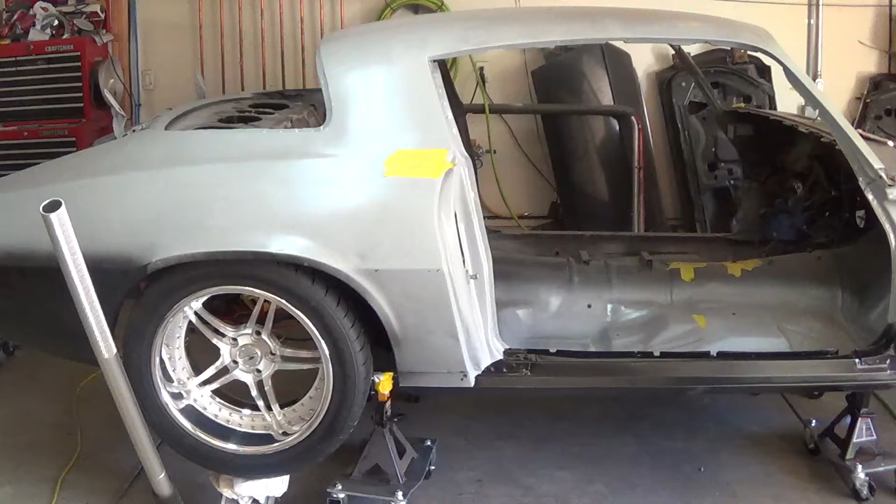Hey everybody, it is ASIC Eric, and we're going to talk about offsets and back spacing and rear ends and all kinds of stuff today.

So you can see I have this wheel tucked up in there about where it's supposed to go. It's pretty close. I think it's about centered in the wheel opening. I think all is about good there. Now where it's sitting right there, it is hitting the seat belt hump in there and is just touching the inside of the lip right here. So it's making contact in both places where it is right now.

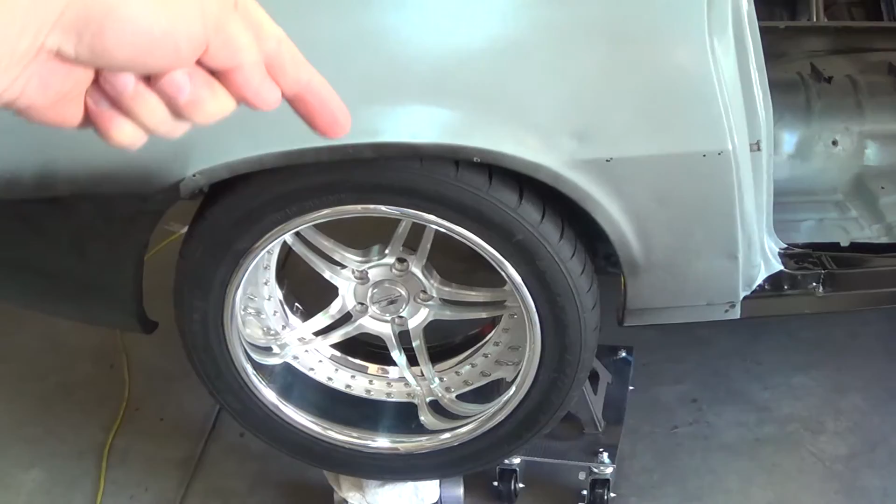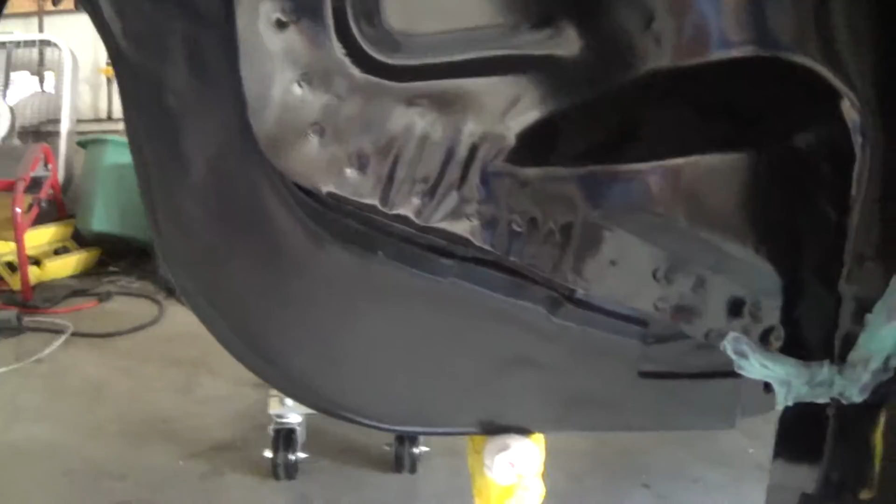As I mentioned in the other video, with this thing pushed all the way back where it's hitting that seatbelt hump, the measurement we get from inside of the wheel to inside of the wheel is 58 inches. And I'll go over all the specs and dimensions on that and talk about how I calculated the rear end size and all that. But I'll drop this down here and show you the stuff inside there that I was talking about.

Alright, so on these second gen Camaros, your trouble spot is right here. This hump right here is right where the seat belt is, the rear seat belt. So that thing sticks out about 1.5 inches to 2 inches at the fattest part. I don't know if you can see, there's some scuff marks on there where the tire's been hitting. So the tire comes to about right here.

So one option you have on these cars is to get the big hammer out, beat the snot out of this and flatten it out basically, and you can get yourself another inch and a half of space there. The other option you have is the lip here. You can roll this lip up and get yourself some more clearance that way too.

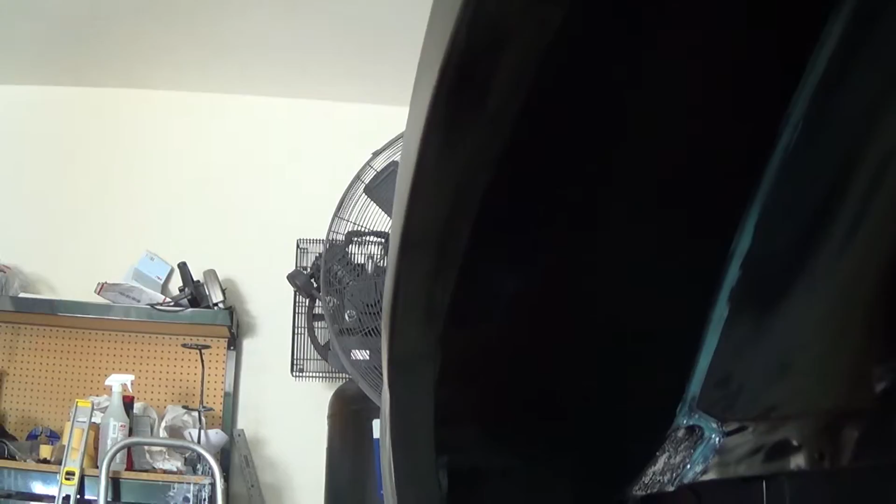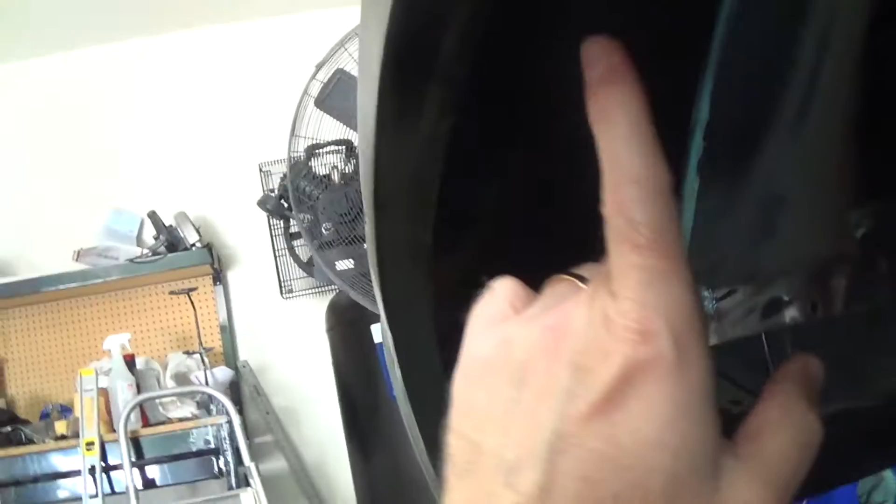So as I was saying, with these wheels, again, these are 18 by 10 inch wheels. We're making contact here and here in both places. But pushing the wheel, like I said, as far as you can go this way, really, is a 58 inch distance from the inside of the wheel to the inside of the wheel. So let's go look at, I made some drawings so we can show how all this works.

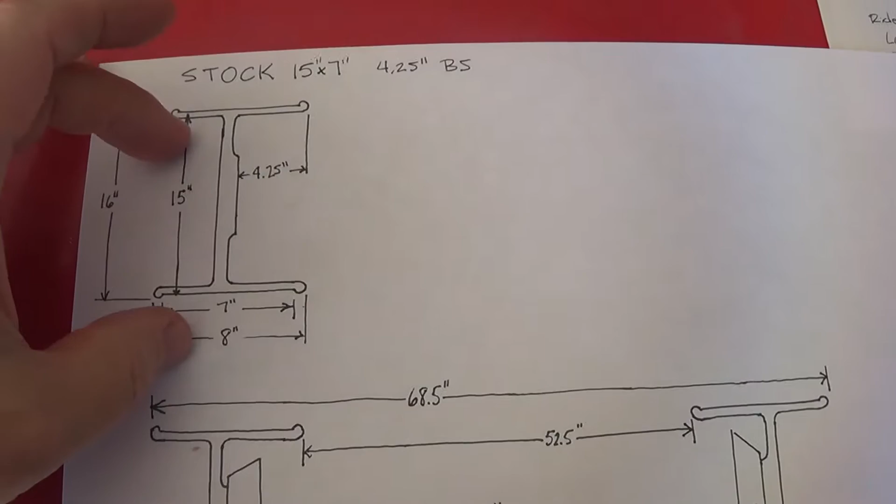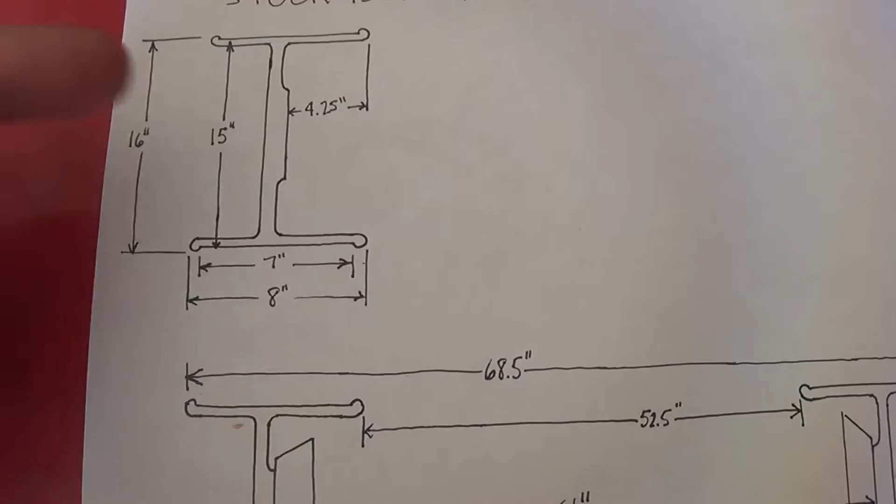So starting with the stock wheels, one thing I didn't realize when I was doing all the math on my wheels was I thought the stock 15 by 7 inch wheels were a zero offset wheel, which meant the mounting point to where this would attach to the drum would be in the center of the wheel. Well, it actually isn't. It's offset by 1/4 inch that way. So the wheel tucks in a little bit from where it would sit naturally.

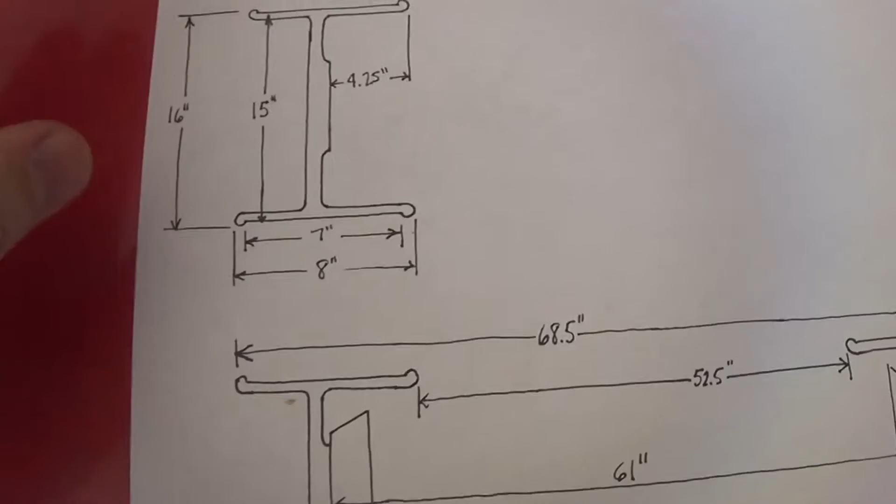And for those of you that don't know, and I hope I have all this correct, I'm trying to go over this as many times as I can to make sure I understand it. So how all this stuff works is, if you have a 15 by 7 wheel, the 15 is from the outer edge of the barrel to the outer edge of the barrel, and the 7 would be from the inside of the lip to the inside of the lip. So that's basically the wheel mounting surface.

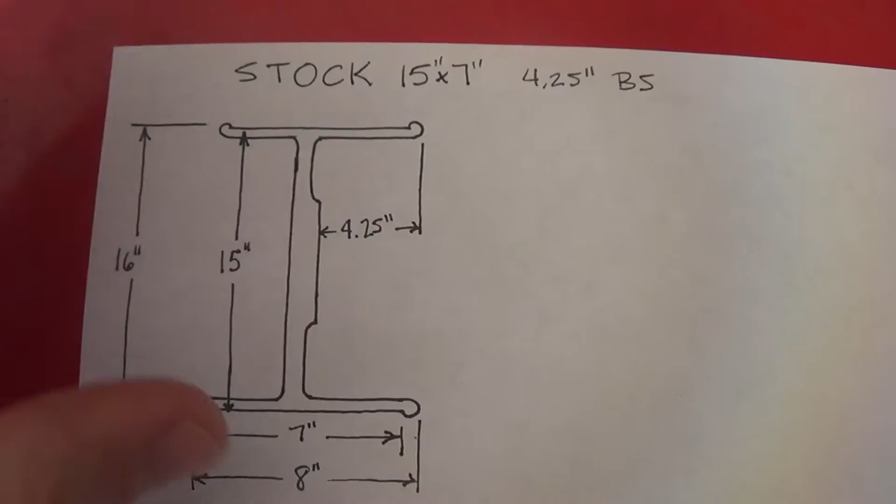So if you look at the tire mounting surface, the dimensions of the tire, that's what you would have. The actual wheel itself is bigger than that by 1/2 inch on each side. So the lip sticks out 1/2 inch this way and out 1/2 inch this way. So your overall dimensions are actually 1 inch bigger. So a 15 by 7 is actually a 16 by 8, as you see here.

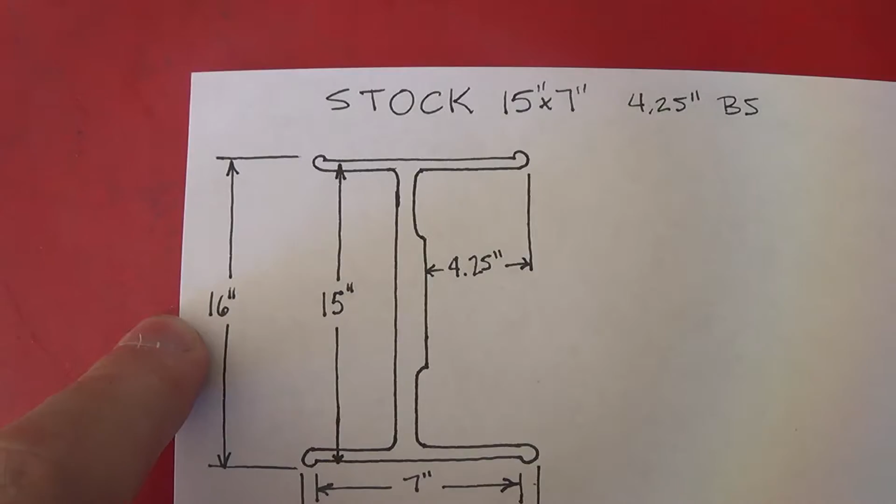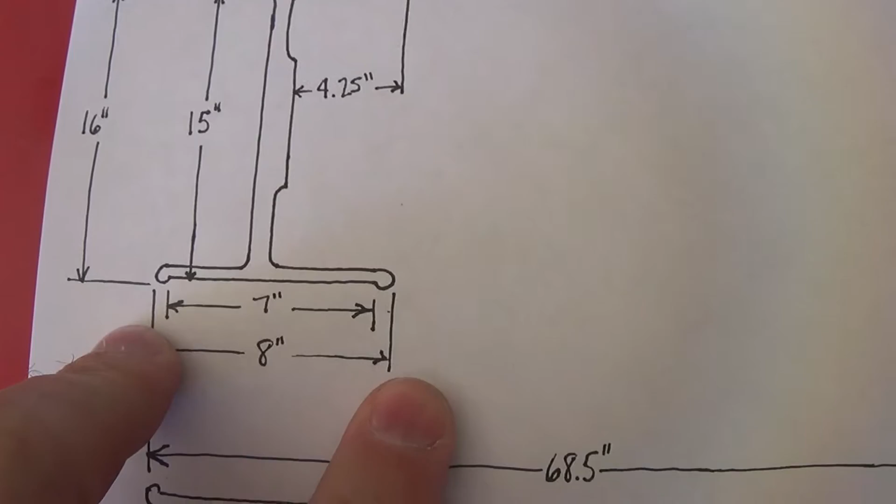The back spacing is measured from the mounting surface to the lip, not to the inner edge. So you're not trying to check the back spacing against the 7 inches, you're trying to check it against the 8 inches. So for a zero offset wheel, being an 8 inch wheel, a 4 inch back spacing would be right in the center, but this is a 4 1/4, so it's 1/4 inch further that way than a zero offset wheel.

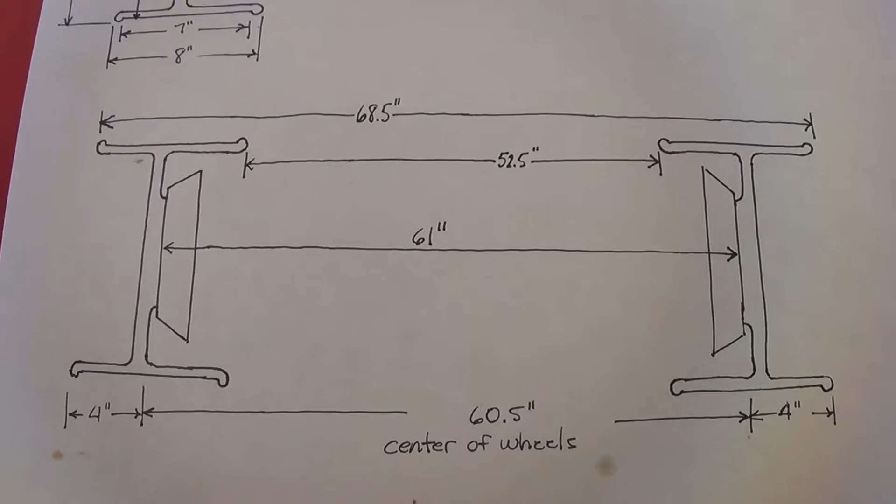Now here's all the dimensions for a theoretically stock Camaro. I didn't measure all this stuff before I took my car apart, but I think this is correct. The drum to drum distance on the stock rear end is 61 inches. I was talking with Moser today and they said 61 1/8. So it's close enough. We're going to call it 61. And then if you apply all this geometry here, what do you get?

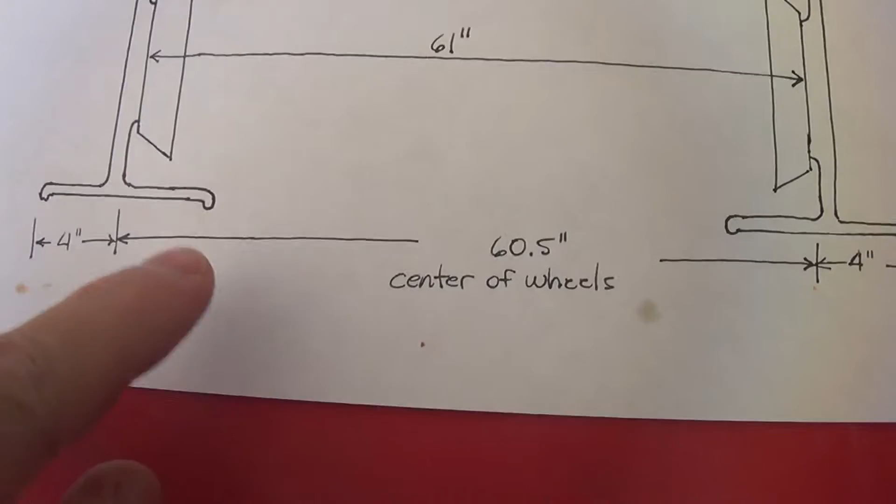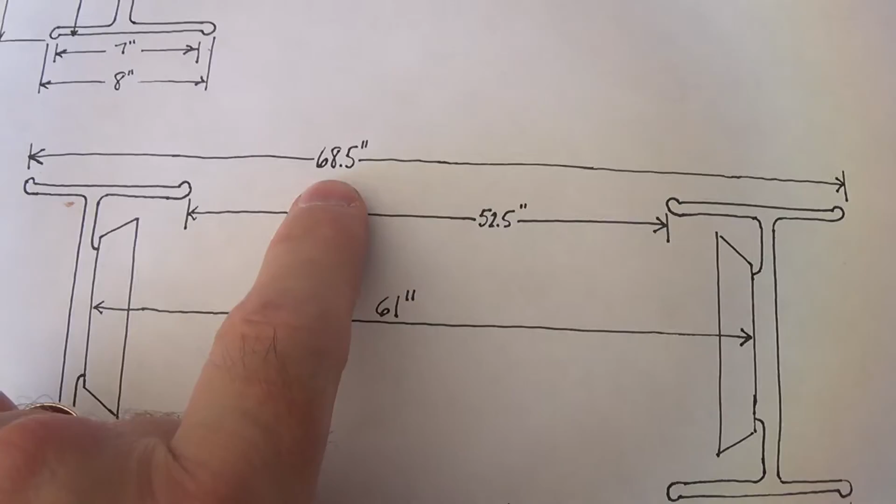So if you take that 61 inches there and you take off the 4 1/4 backspace on each side, that gives you this dimension right here. So from the inside of each wheel rim lip to the inside of the other is 52 1/2, and if you go to the outside it would be 68.5. Okay, and then the other thing that I did for calculation is where would the center of the wheel be.

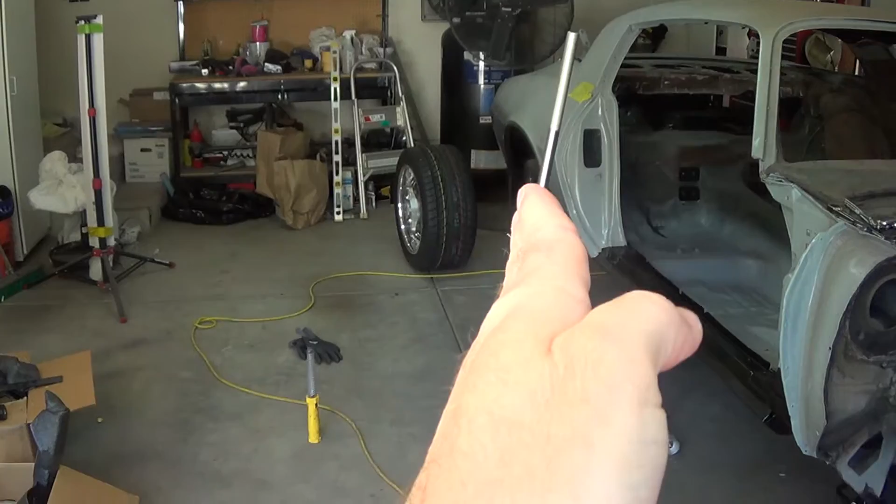And if you measure from the center of the wheel to the center of the wheel, which is theoretically, I don't know if it was done this way from the factory, but theoretically the center of the wheel opening there, you get 60.5. So that's all stock, which is not what I'm doing, but that's what you have.

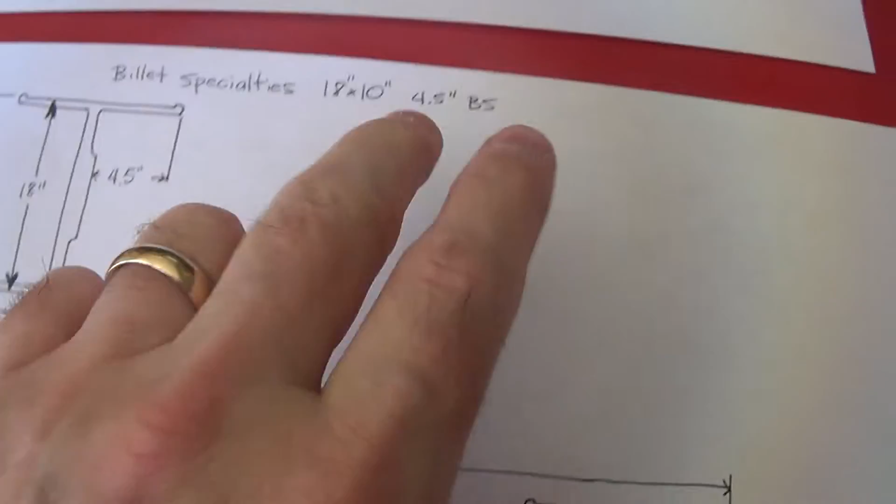Okay, now you go from there to the wheels that I have. So the wheels that I have are 18 by 10 with a 4 1/2 inch back spacing. So if you go through all of this stuff again, same idea. So 18 by 10, those are the inner dimensions there. So that's really a 19 inch by 11 inch wheel overall.

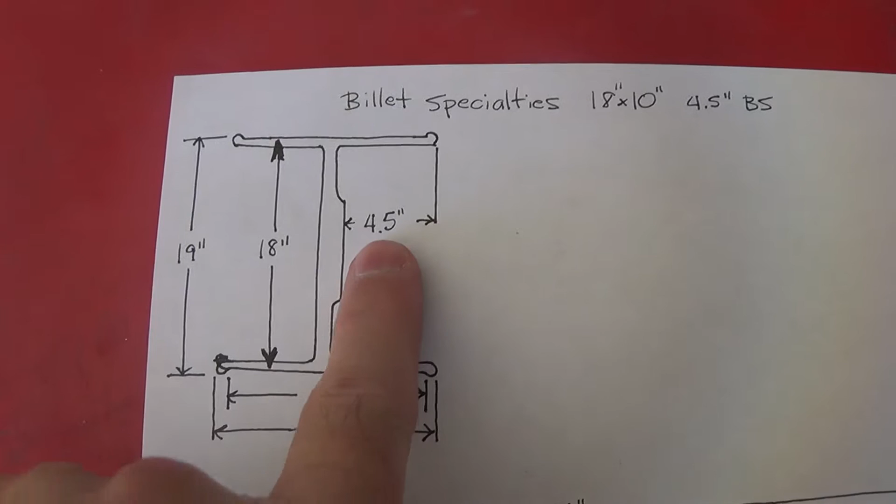So since it's an 11 inch wheel overall, a 0 back spacing on this would be half of that, which is 5.5 inches. But I went with 4.5 inches, as I mentioned a number of videos back when I got the wheels. So that moved the dish of the wheel in by an inch to give me more barrel here. So that's a 4 1/2 inch back spacing.

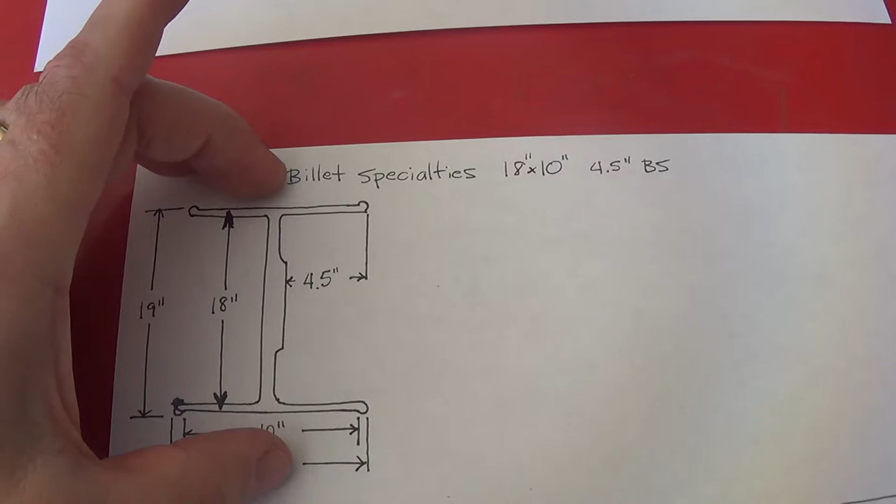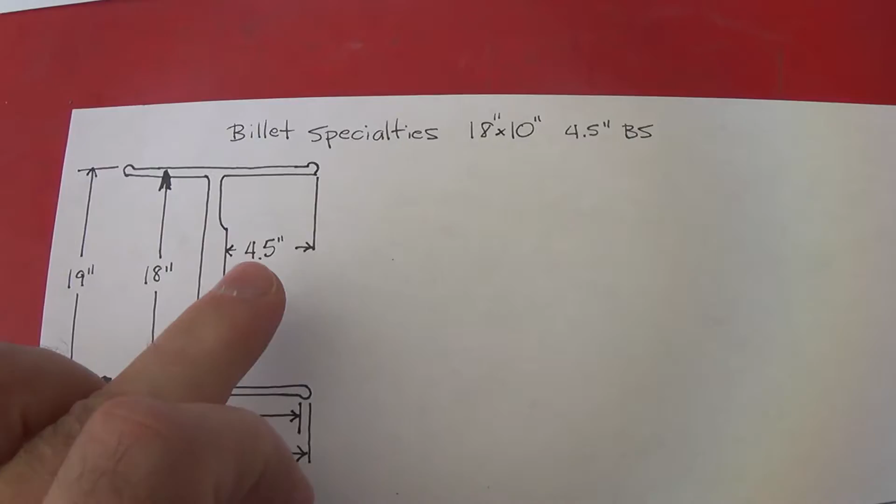Okay. Now, when I got those, I assumed that basically a stock wheel would have been a 5 1/2 inch back spacing, and I didn't realize this had this extra quarter on it. So I've actually taken 1 1/4 inches off of each side, not an inch off each side, from what the stock equivalent would have been. So that means between the two wheels I'm 2 1/2 inches more narrow than the stock rear end should be by pure math there.

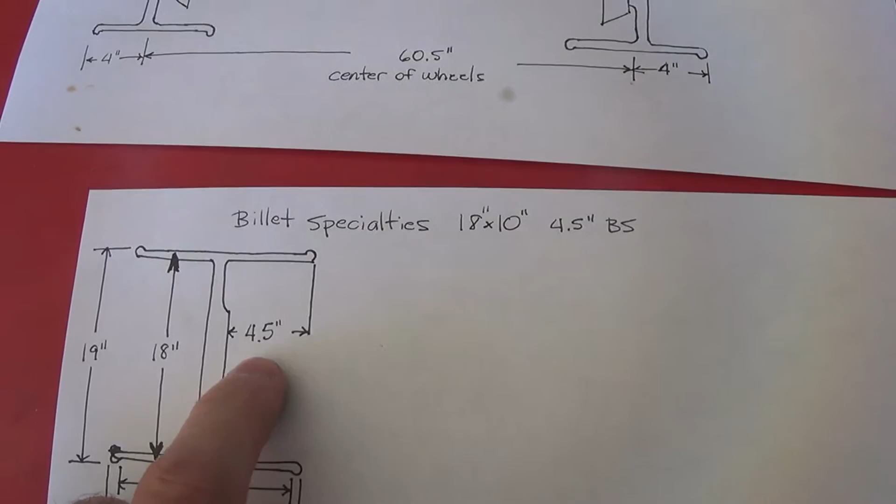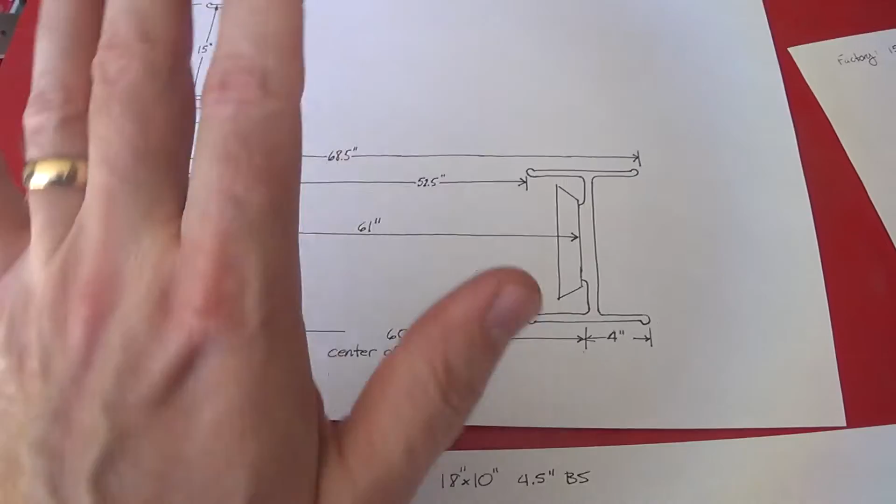And if we take the drawing here, let's go back a second. So I said if I'm 2 1/2 inches less than what a factory setup would have been, that would put this at 58. And as I mentioned in the last video, I measured 58.5. If you pull the wheels a little bit off of those seatbelt humps, that was 58.5. So I did actually get a measurement that makes sense there. And like I said, if I mash them in as far as they'll go, I get 58 inches. So that's what I used for this measurement here to see how everything matched up.

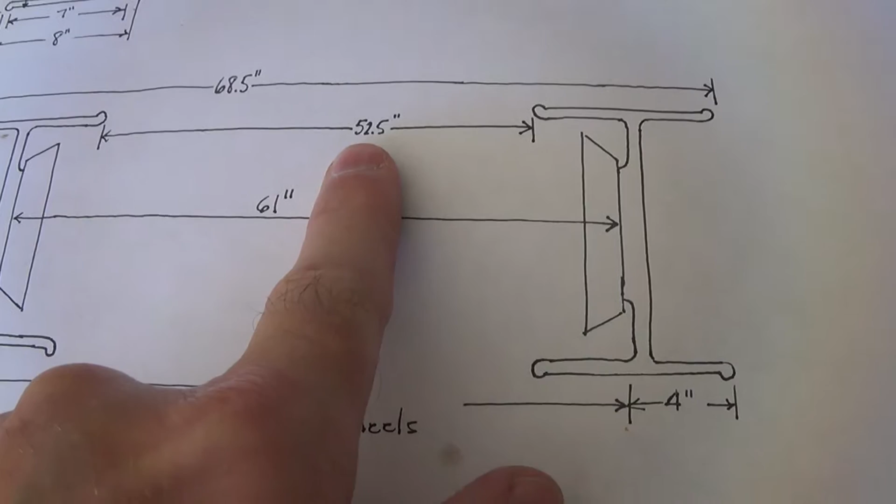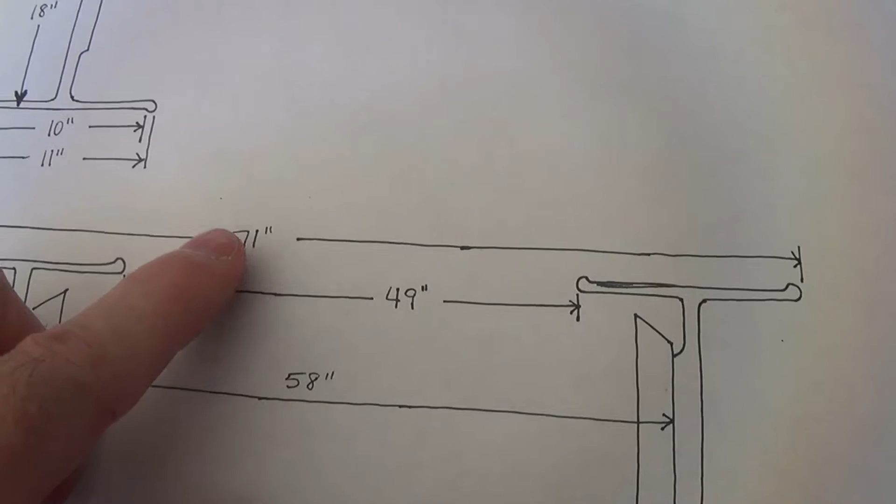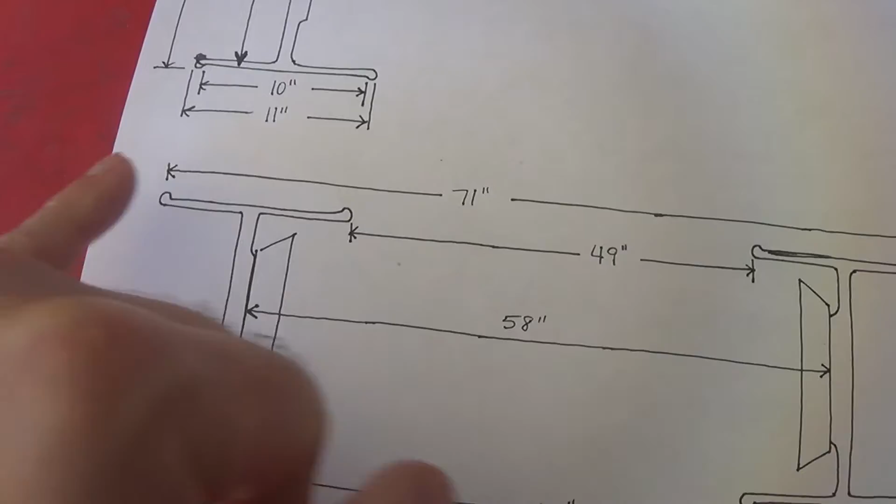So with 58 inches, drum to drum equivalent, you have 49 inches from the inside to the inside compared to 52.5, right? So you're a full 3 1/2 inches total further in, so 1 3/4 inches closer to that seatbelt hump. And in this direction we got 71 versus 68.5. Okay, so same thing there. Is that right? Yeah, 2 1/2 inches. Same thing. So 68.5 versus 71. So they stick out further by 2 1/2 inches total. Am I doing that right? Yeah, that's right. So it's sticking out further this way and sticking out further this way.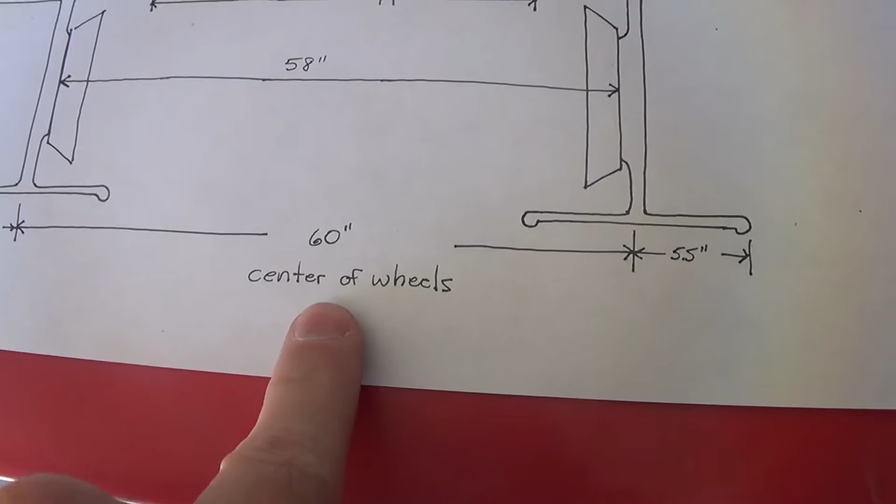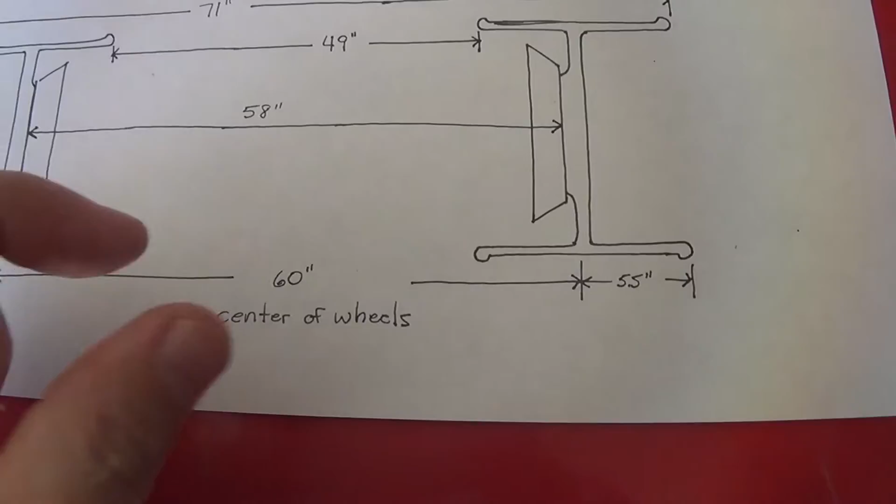Okay. Now, if you take those two and split the difference, you'll see that what it should be is 22 inches between those two. These wheels are 11 inches wide, so that makes sense. So if you do the center distance now, it's 60. So center of the wheel to the center of the wheel is 60. Up here, we get 60.5. And as I said, when I ordered this, I didn't realize that extra 1/4 inch of backspace. So if you account for that, then I would have 60.5 if I had done it that way. So I am 1/2 inch narrower than the stock equivalent would have been, which is fine. So that is as far in as I can get those things.

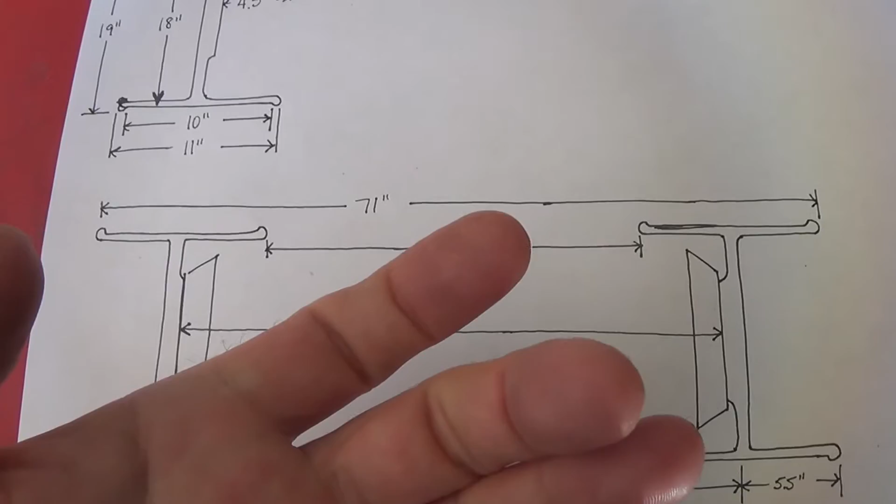So now what does that mean for the rear end? If I order the rear end at 58 inches, I'm reasonably confident I couldn't really install those wheels much further in. I would definitely have to clearance those seat belt humps to get it to work at all, because they're rubbing up against it right now. And even at that, I will still probably have to roll the lips a little bit. So I can't really see going much less than that. I might be able to get away with a little bit more than that, but 58 inches is pretty tight.

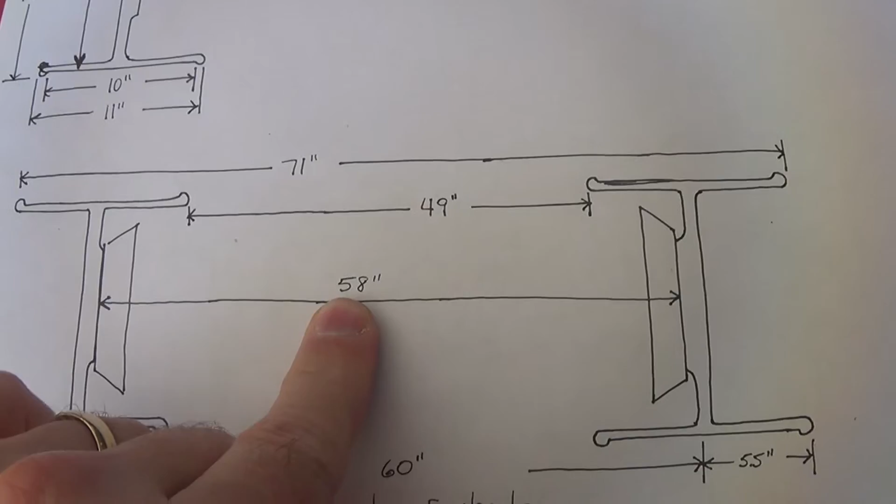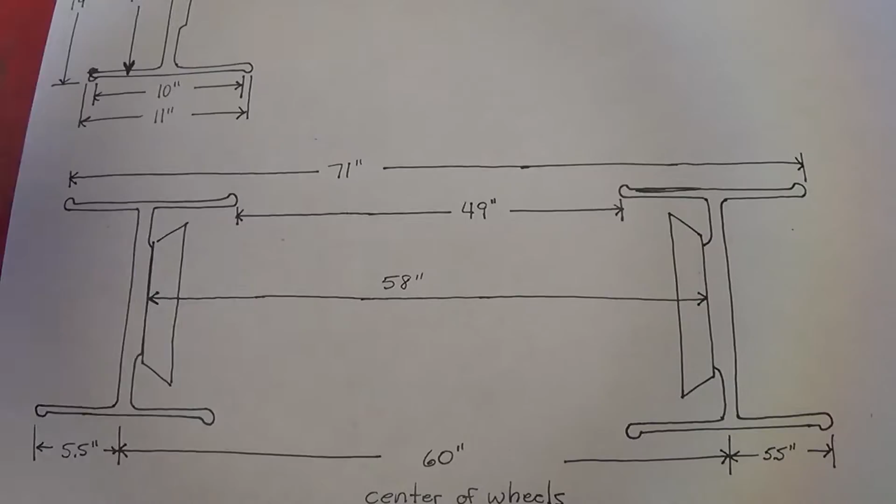If I went with the 58.5, which is what I measured by getting them off of those seatbelt humps, then I've got to roll the quarter panel lip more. But then I'll be within a 1/4 inch of that seatbelt hump, which might be okay. And then I don't know what other clearance issues I might have with the rear end and stuff. It's got the 4-link in it, which has offsets for the control arms to allow for wider tires, so that's probably not going to be an issue.

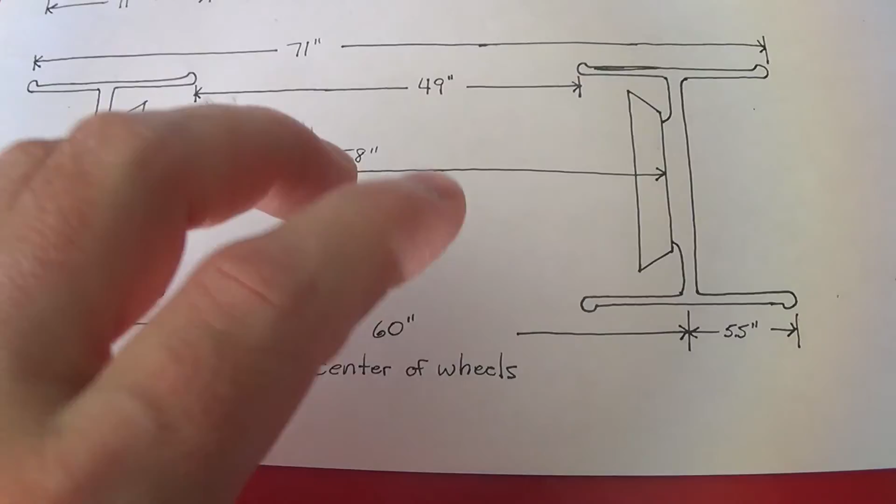But anyway, talking with Moser today, what I decided to do was I'm going to go ahead and order it at 58. So all the dimensions you see here basically. And then I'm going to try and get that to fit as is by massaging the seat belt hump, and probably still going to have to do a little bit of the fender lip.

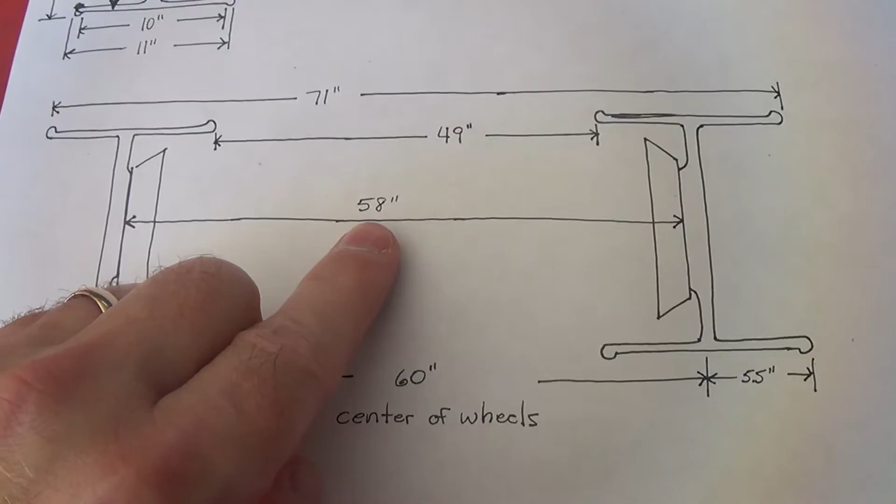And if that's still not what I want, I can put a couple of spacers on here, like 1/4 inch spacers or something, to move the wheels out a little bit. And then I'm okay. But at 58, I'm fairly confident I'm going to be able to get it to fit. You saw how the wheel was fitting up inside the wheel well. It was pretty comfortable up there.

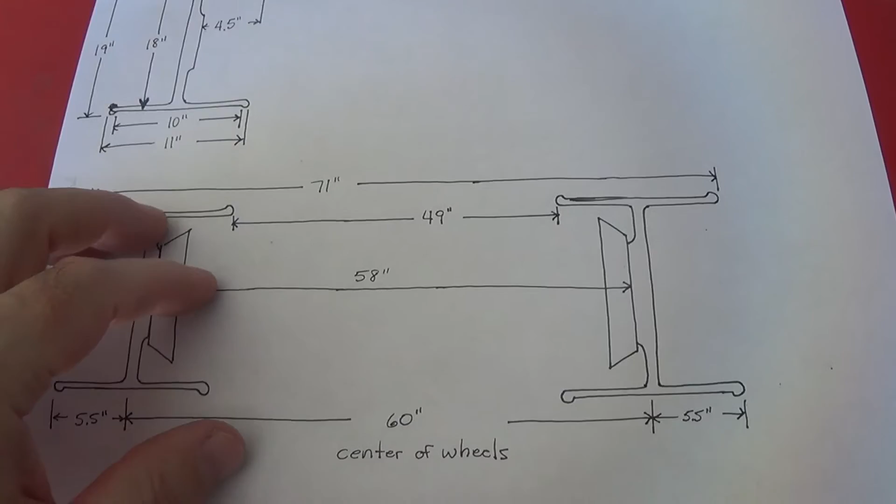There's not a lot I have to do on the fender, or the lip, to get it to fit. Just a slight roll, I think, would be it. And that was about as high up in the travel as it's probably going to go. Maybe a little higher than that with the suspension travel, but it's probably pretty close to that. So I think this number is going to be okay.

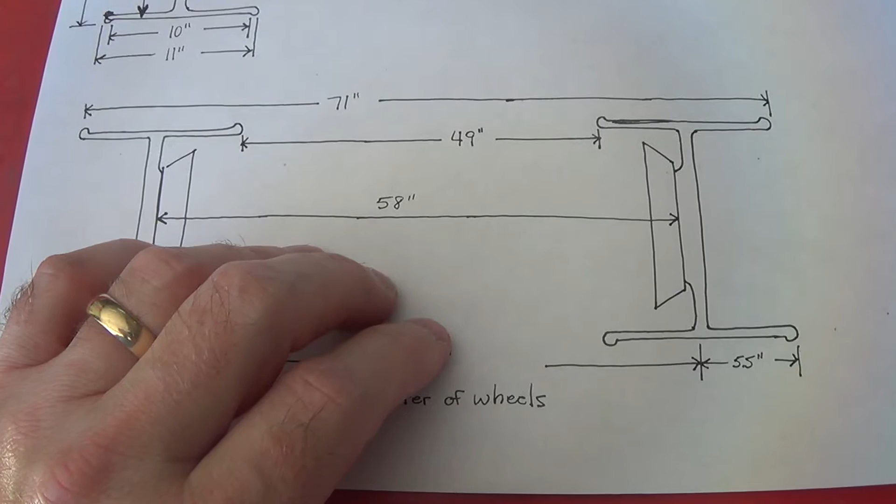I hope so anyway. I didn't really feel comfortable going any more narrow than that, because I potentially would have to have some pretty big spacers on there, and I don't really want that. And then to account for that, on the rear end with disc brakes, they suggested 1 3/4 studs. To account for the 1/4 inch spacers I might want, I went ahead and got the 2-inch screw-in studs, which will give me an extra 1/4 inch of thread to account for any spacer I have to put in there. So that's good.

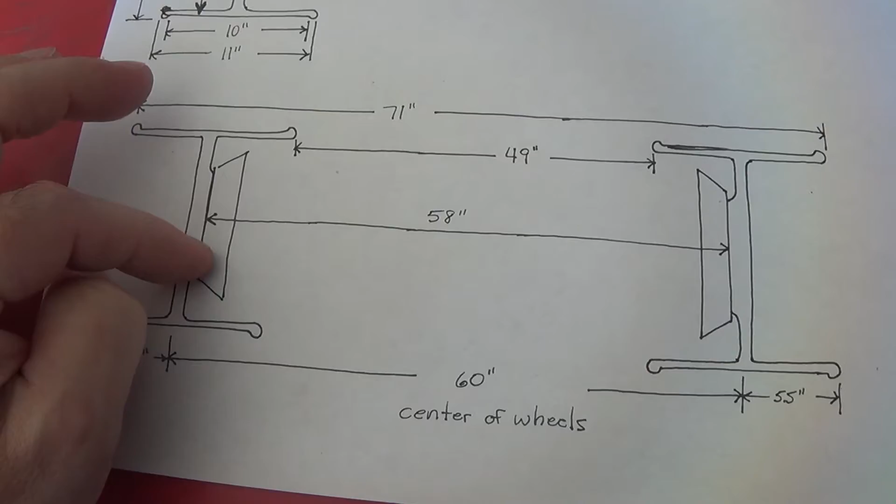So I went through all of that with them today and ordered the rear end. So the rear end we ended up going with is, hang on a second. All right, so I have all the specs here. We have the Moser M9, which is a Ford 9-inch housing. We went with 31 spline axles. They said that's good up to about 600 horsepower, which I'm probably never going to be pushing. 400s, low 500s. I'm not going to go any crazier than that.

Went with the Wavetrac differential. That comes with a lifetime warranty on the differential, or whatever the heck it's called. Got the Wilwood Dynalite Pro brakes, which should resemble the brakes I got on the front, with the drilled and slotted rotors with the red calipers. 1350 steel pinion, the aluminum case. What else? I guess that's probably all the most interesting stuff. I don't know if I said or not: 3.89 ratio.

Going with the T56 transmission, the close ratio one. People will say between 3.70 and 4.11s, depending on who you talk to. So I kind of split the difference and went with the 3.89 to 1. I know it's kind of guesswork, but hopefully that's okay. The good news is you can change the gears if you need to. Especially on the Ford 9-inch, it's so easy to do. Just pull that carrier out, and then you can swap the gears around.